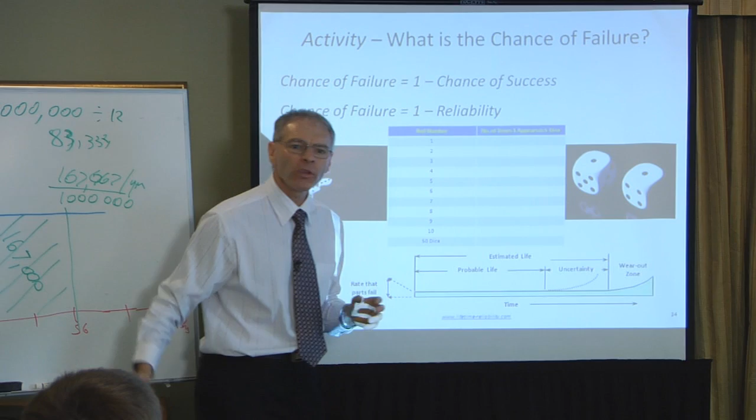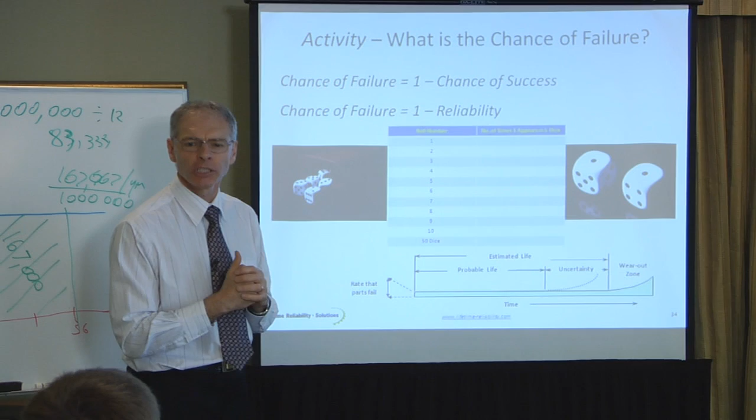If I roll the dice and I get two ones here and those two represent a failure, then what can I do to ensure that those failure situations don't arise? If they aren't there to have an opportunity to fail, then it can't be a failure. The machine carries on going. So this concept of chance and managing chance becomes very important because reliability is the chance of success. If I want to have high success, I've got to have high reliability because the two are linked.

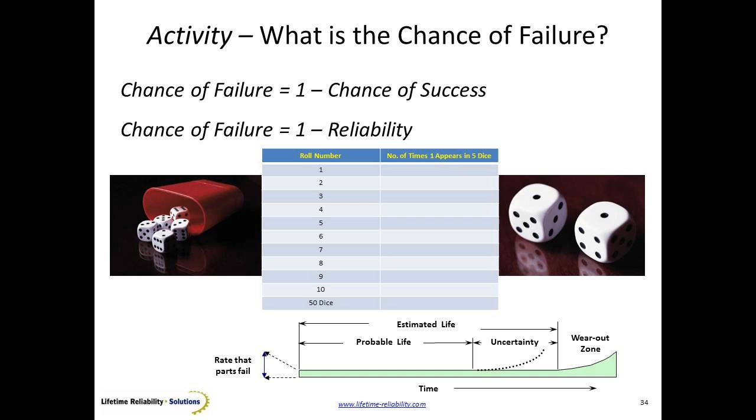So whatever affects reliability and lowers that, I've got to stop that. I've got to find it and stop it. Then I have created a higher chance of success, which means eventually the failure rate will decrease. Doesn't mean it's going to happen overnight. Some of these things take months to come through, but if I'm doing the right things to begin with, the right results come out at the end. So I want to start with what are the right things, and start doing the right things because they will pay off down the track.

Okay, so what are the sort of things that are opportunities for lack of reliability? Poor balance, wrong fits and tolerances, wrong tension in fasteners, shafts that aren't aligned or shafts that are loaded up and stressed, rubbish in our lubrication. These are all opportunities for things to go wrong. It doesn't mean because they are there it will go wrong. It just means where they are there, there's a chance it'll happen.

If there were no problems with fastening, if my shafts were correctly in line, if there was no contamination, then the opportunities would not be there. The chance of failure, much, much less. So if I can manage contamination and prevent it, manage alignment and ensure it's correct, get the right fastening, get the correct fits and tolerances, get the correct balance, I will cause reliability. I will decrease the chance of failure.

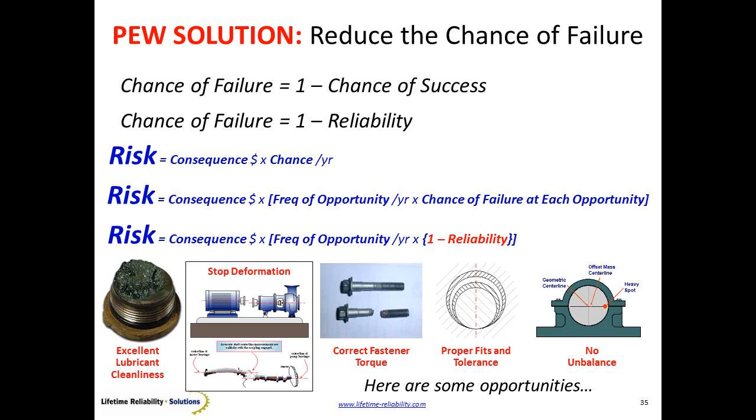So now we have our risk equation. Risk is typically consequence times chance, as most people see it in the books. This is a situation that Einstein warned us about. One of his advices was to make things as simple as possible, but no simpler. And I think the mistake we've made with risk is we've made it so simple we've actually missed the real meaning of what risk is, because this equation here has dropped off one factor in risk.

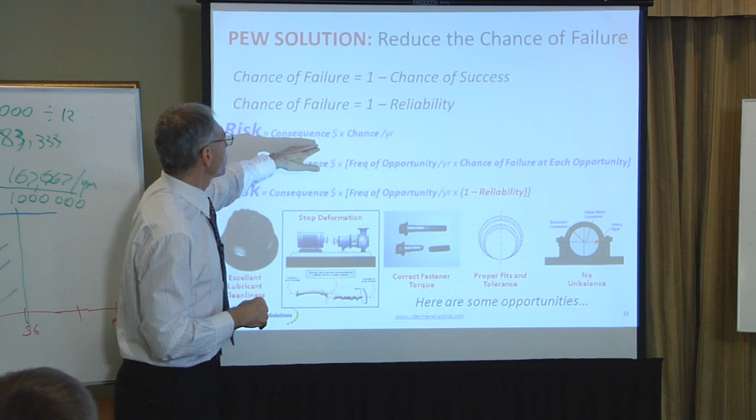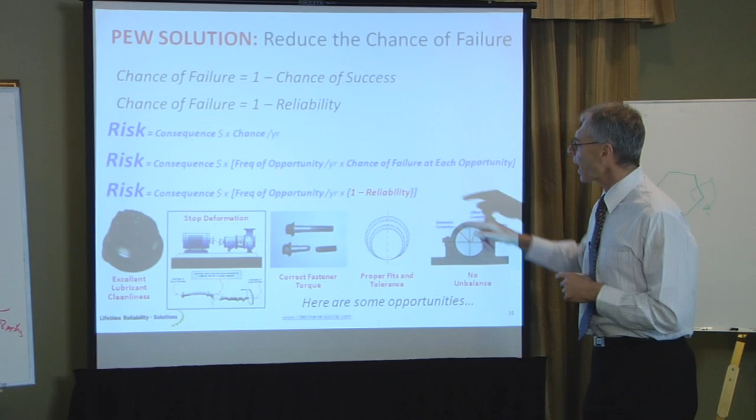The full equation of risk is consequence times the frequency of opportunity times the chance of failure at each opportunity. What this equation has done is dropped off this opportunity word. It doesn't show us there are actually 3 factors that affect risk. And this chance of failure is actually 1 minus reliability. There it is, chance of failure, 1 minus reliability. So I have now tied reliability back to risk. High reliability and this risk of failure is reduced. If my risk of failure is high, my reliability is going to be low.

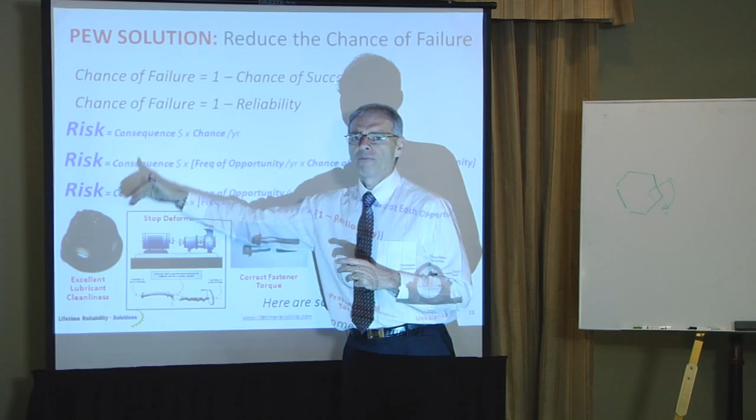So if I can manage opportunity and prevent that by everything being right, then as a consequence, opportunity gets smaller and smaller. If I can ensure reliability by making the right choices, by installing things correctly, by running things correctly, then these 2 factors can't work together and the risk of failure drops lower and lower and lower. And that risk of failure falling means my uptime increases, my throughput increases, my costs are reduced, all the things we want to see happen.

So yeah, that's why I'm confident. It's not going to be impossible to get these outcomes because all of these are controllable. Once I set the standards that deliver high reliability and meet those standards every single time, then I will produce those results.

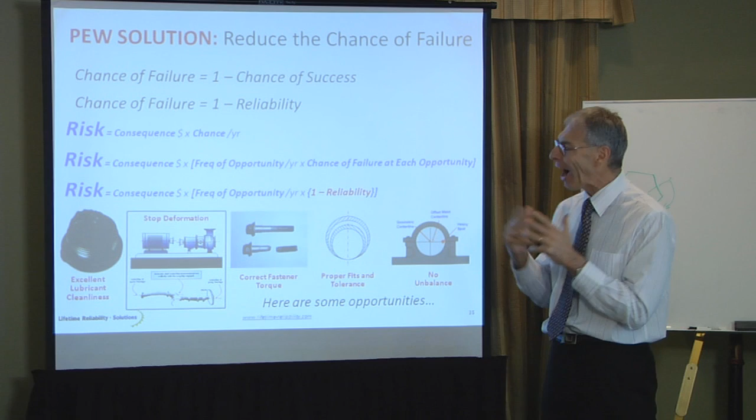What this is saying is a couple of things. All of us have a risk boundary. You drive a car? Do you know what? People die on the road from driving cars. So you're going to drive home from this place? Anyone? Yeah, we all accept a degree of risk, even though we can die tomorrow on the way home.

So companies are the same. We will accept a degree of risk and do nothing about it. We're going to let the dice roll and just pray the dice falls the right way, but knowing full well they might go the wrong way, in which case, shucks, what a shame. Now, that risk boundary is very important because in that area there, nobody will do anything. Managers won't move, CEOs don't care, nor do you and I.

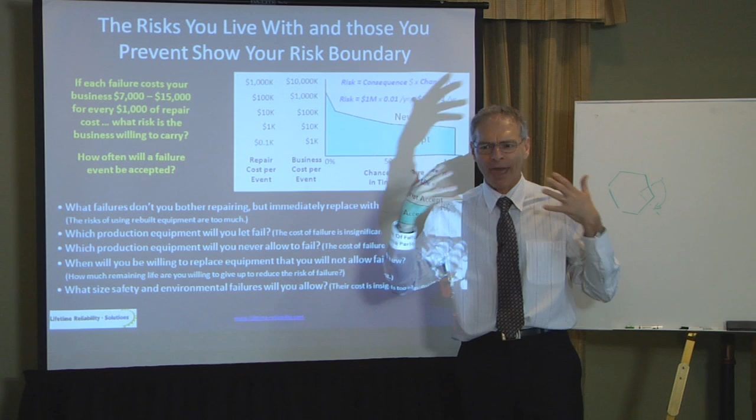So that's human nature. I've got to know this risk boundary for every company because out of that risk boundary, people will move. It's too much risk to carry. We understand the implications of that. So I've got to make sure when I speak to companies and managers about risk that they understand the full size of the boundary they're talking about, how big a risk they're actually carrying.

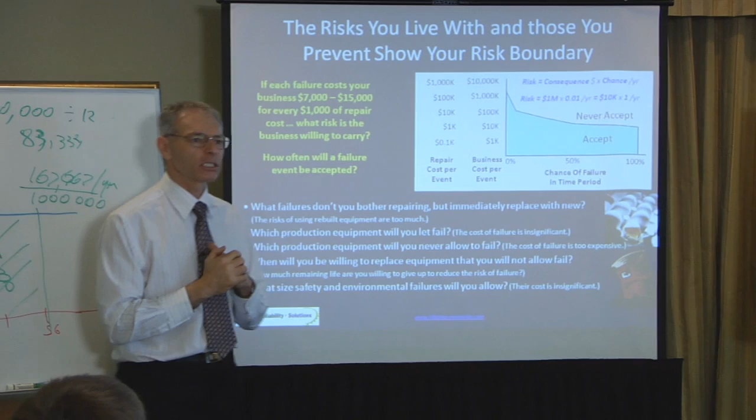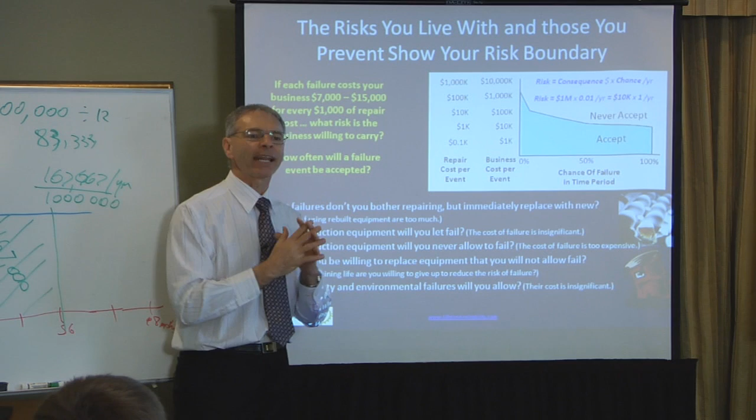Because when we have a breakdown, that breakdown is going to cost money to fix. It'll be maintenance time, maintenance cost, it'll be downtime for the plant, it'll be opportunity lost, money we don't make because the parts that we would have made aren't there to be able to sell. So there's a whole lot of money lost when we have a breakdown. And so when I build this risk boundary for companies, I've got to find every single cent that they lose and that they miss out on making had there been no failure.

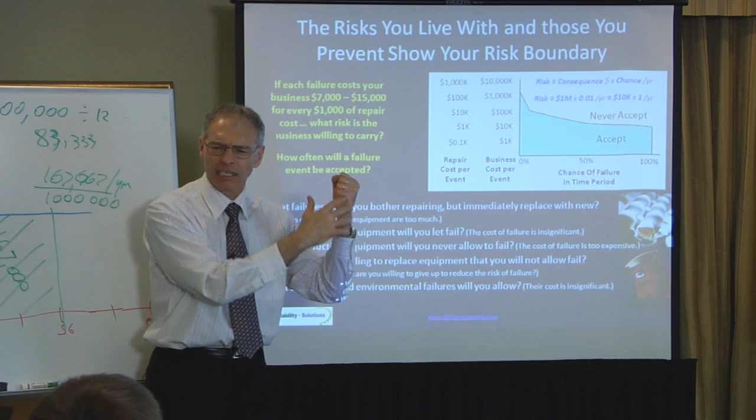And my experience is that I can work out a ratio between the cost of direct maintenance versus the total cost to the business of all the losses and costs. If I can get direct maintenance cost, that's easy. That comes out of my computer system. Easy to get those numbers. To get the total business-wide cost, not so easy because there are so many unknown factors. How many sales could you have made but actually weren't made? You don't know that. But there's a way of allowing for those.

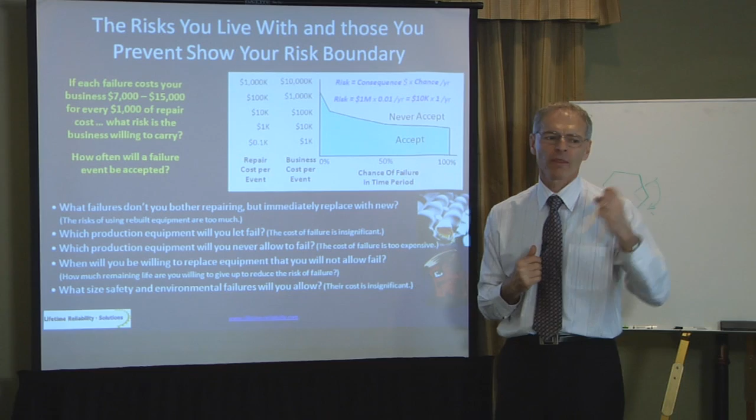What I found is when I do the calculation between direct maintenance cost and total business-wide cost, typically it falls in a range of 7 to 15. Direct maintenance cost of $1,000, depending upon the process and the company involved, company-wide may actually mean a $7,000 cost or loss, up to $15,000 cost or loss. So to keep things simple, let's call it 10:1. For $1,000 direct maintenance cost, the business loses $10,000 on all the costs and losses that it's incurred.

So now my risk boundary isn't the direct maintenance cost only, it's actually the total money the company's lost. So when a maintenance repair costs $10,000 on the books, the business actually lost $100,000. And $100,000 has more meaning than $10,000. Is that difficult to get a company to acknowledge that extra cost, beyond the maintenance cost? Because in some sense, it makes them look negligent because they've been ignoring these.

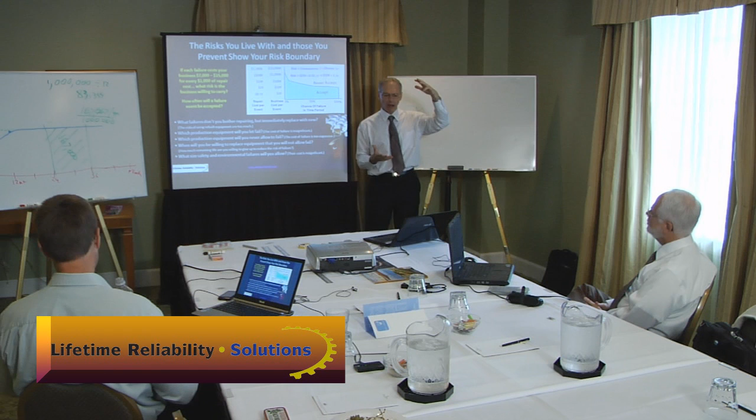It's hard to find how much sales we would have made. They are nebulous figures. So yeah, to get an exact figure is not so easy. To get this ratio, what I actually did back in my time as a maintenance manager is I got some real breakdowns and went back through the whole history of the breakdown. Spoke to the guys that were involved with it, who they spoke to, the knock-on consequences and the different people involved, and I put together a long spreadsheet of all the factors, all the costs, and did a research and analysis, and came up with these two ratios here. Look, it is nebulous, but it is certainly definable. The whole point being is the company will pay everything.

Even though we don't see the money going out, the company is going to pay that money anyway. In extra overtime, in sales that could have been made but that weren't there to make, we're going to lose that money regardless. Though it's a nebulous figure, though it's perhaps undefinable, the money is there, and it's just not there to be made now because of the breakdown.

So I want to make sure that our managers understand this risk boundary. They've got to see the real risk boundary, not the one that they think, but the one the company's actually suffering. Because that number often is a massive number. And that number will justify some big changes and will finance training and finance new machinery and finance new systems. But they just don't see how big a number that's actually falling off the table.

And that's the challenge when we talk about plant wellness, is to show the real financial cost. Because until people see where the money is, how much is sitting on the table they could have got, but just can't see it, they won't move. So I've got to force people out of this acceptable range and say, oh, we'll live with that, into, hey, you know what you're actually missing? You're actually missing absolute fortunes in profit.

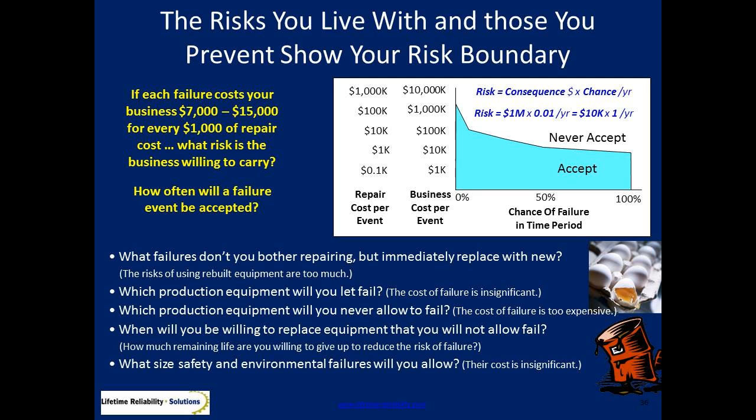Managers are inclined to say, well, this is just the cost of doing business. This is the way we've always done it. This is the way my predecessor did it. That's the way I do it. And I think that's why we know all the answers and they're not being used, because I was taught wrong in university as an apprentice. If you learn off the manager in front of you and you do it his way, I'm sure he's taught wrong. This is what happens. We're just monkey follow monkey.

That's what's wrong. Yet there are companies that do it so well, we look up to them and say, show me the way. They're all out there, they know what to do. I just can't get it to work in my company. And plant wellness is about getting one process, one way only, to make it work in every company. That's the hard part. That's the bit I want. Make this work for everybody, not just for the leaders.

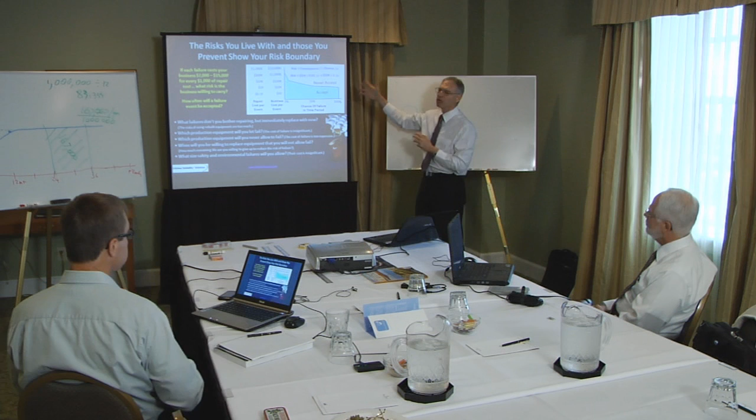Fantastic. I have confidence we can do it because they're doing it. But it's no good to you and me with a struggling company. I've got to find an answer that I can afford. I've got to show them where the money is. They're losing absolute fortunes. That is so easy to get back once you see it.

The risk chart is actually a volume, because there are three components in risk. There's cost, opportunity, and reliability, and the chance. So it's actually a risk volume that we're dealing with, not simply a flat chart. So I can control opportunities. If I can reduce that opportunity to less and less, if I can reduce the chance of things going wrong, then my volume of losses decreases, and the losses that are not happening become profit that I'm now collecting.

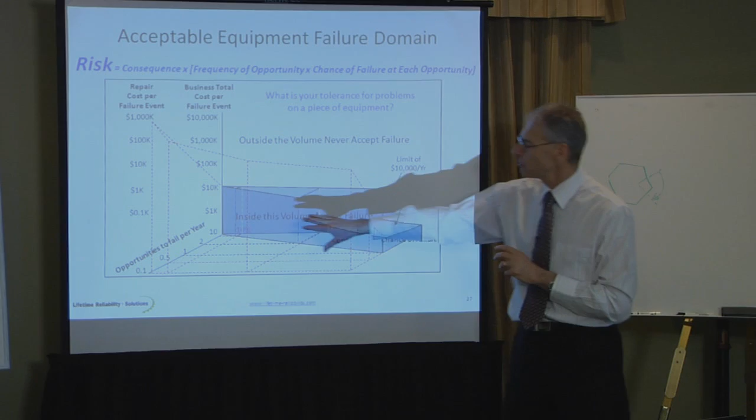So I've got to find answers to prevent opportunities and to reduce risk across the whole life cycle and everybody involved with the machinery. So operations are going to be involved, engineering is going to be involved, maintenance is going to be involved, and finance is going to be involved. I need everybody in the company to understand we all play a part in the success to win back these issues now.

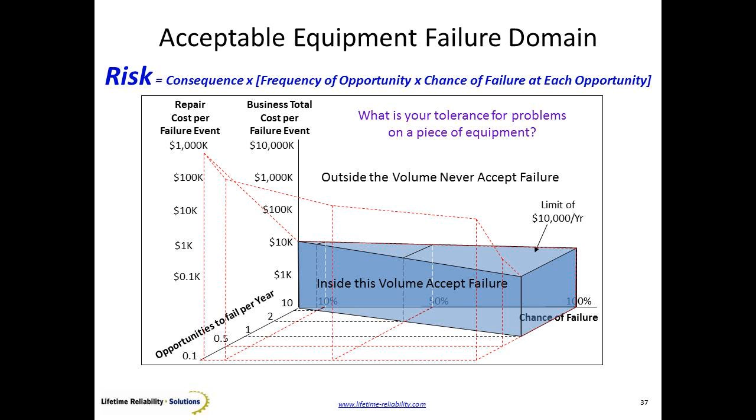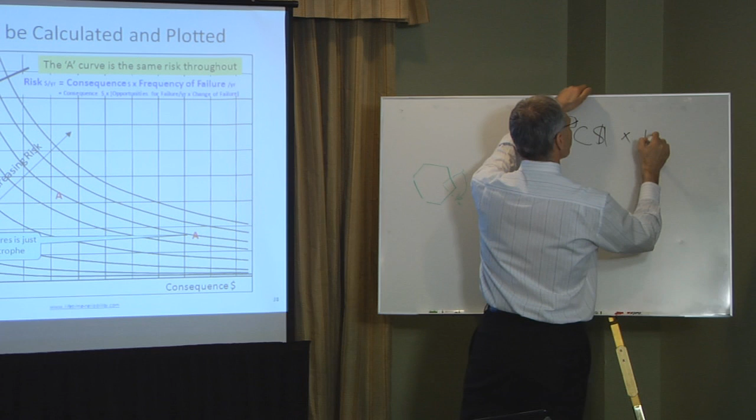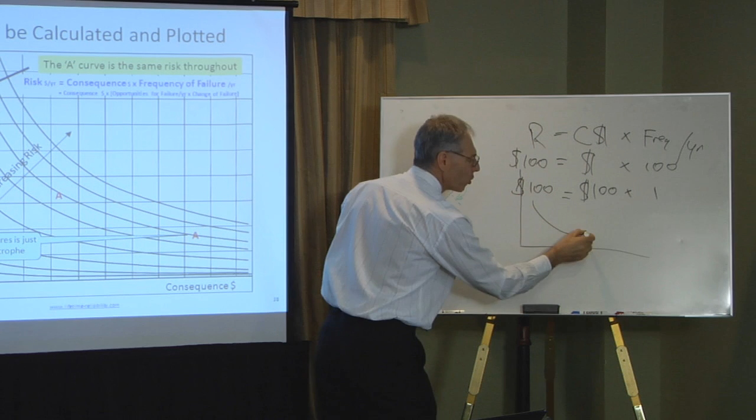Risk, when we chart risk, if we put it on normal type axes, then we get a curve. So risk, if I keep that simple, risk is equal to the consequence, which is dollars, times frequency, which is frequency per year. If I plot that, so if it's $1 and it happens 100 times a year, my risk is still $100. Or it's $100 times once a year, still $100. So that's how we get these curves from that one equation. We just change those numbers and then we get a curve plotting across our chart there.

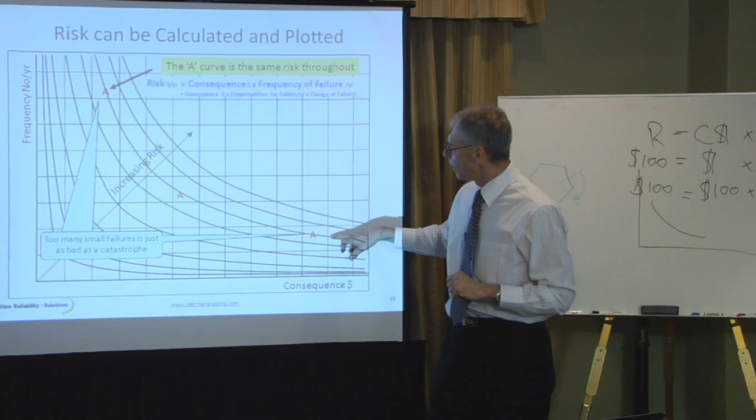What's important here is to realise that risk, that curve, is the same risk of the company. So down here, high consequence, that big explosion that blows up the place, once only, huge consequence, don't want to do that. That's obviously going to destroy the business. The trouble is that risk is the same.

So if I have a problem that comes back again and again and again, over the years, that cost is the same. So repeating problems that cost a little bit of money but are always there, I'm always fixing those, in the end, as bad as the whole place blowing up. The money goes. Instead of being a bucket of money, it's a little drip. Drip here, little drip there, little drip there.

The trouble is the business pays for the lot. So I cannot carry small risks that repeat, because that is a leak. And that leak eventually will drain the business out. If I've got many leaks, I am forever putting stuff in the top to replace what's been leaking out. That was the trouble that these guys were suffering.

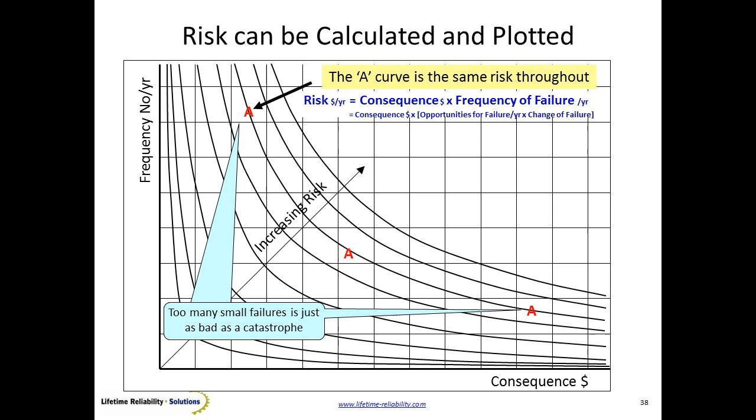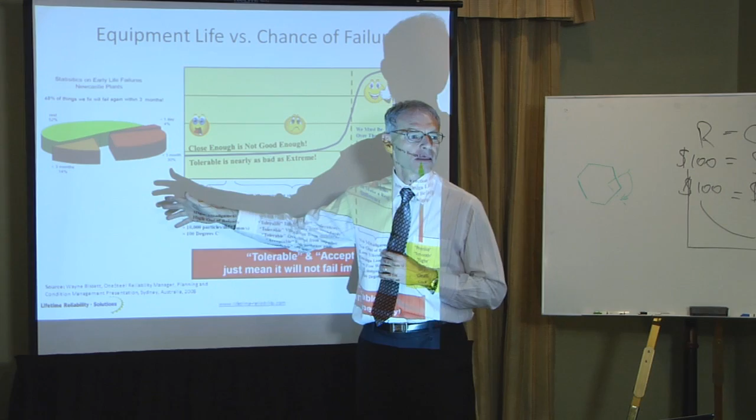Half of what they're doing repeats every 3 months. 1/3 every month. They had massive little leaks. They had thousands of these little leaks, sucking money, sucking the blood out of their business. Because the big stuff everybody sees, that's a big problem, we protect against that. They forget about the small ones. And the small ones are as bad as the big problems in the end. So I've got to be careful. That's what risk is about.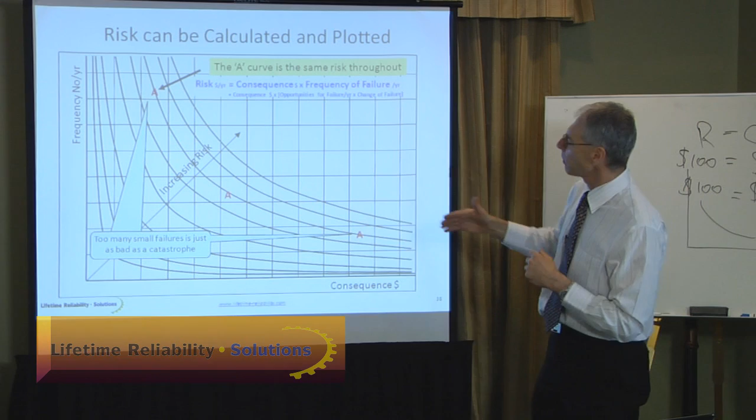Now, risk is that curve. Anywhere along that curve is the same money I'm losing. If it happens to be one event here across 10,000 events, but I've got 100,000 events happening every day, I can lose money very, very fast, but a small amount each time.

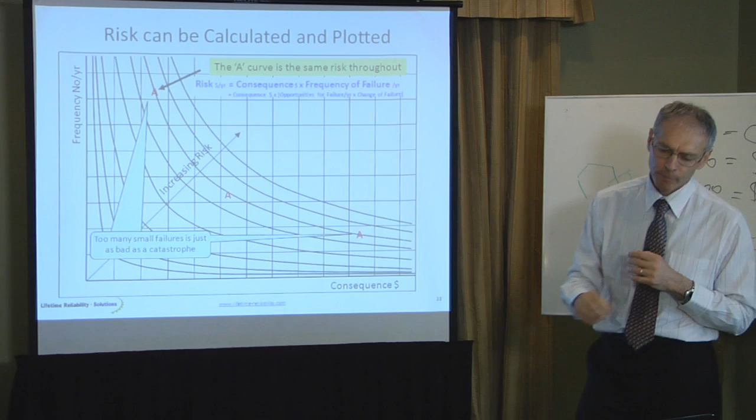When we plot risk on a log-log scale, we get straight lines. Now, you've probably seen a risk matrix, and they use this arrangement here with the different colours. It comes off the log-log scale. So we tend to work in log-log with risk because we're talking about big numbers, millions of times, a chance in millions or a chance in 10,000 years. So we tend to work with log-log scale, but it comes off the same mathematics.

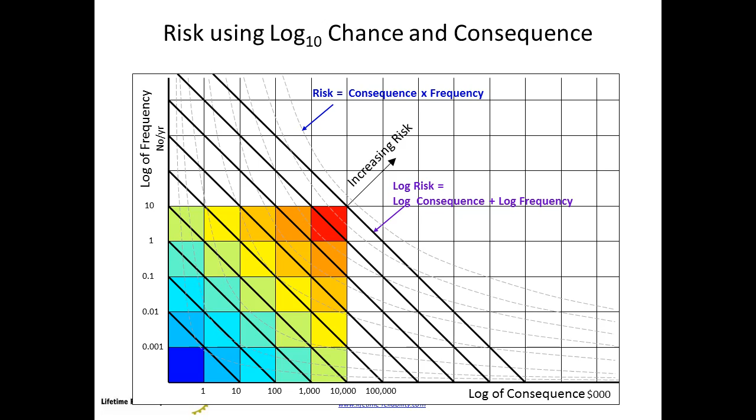So from our risk graph, we get our risk matrix, and this is the stuff many companies now use in terms of managing their safety requirements. What I'm just saying here is be careful. Here on this sort of matrix, we've got lots of red. Lots of red, of course, is bad, extreme risk. The trouble is that comes from this part of the equation up here. And it's only a small area on the actual graph that is a high risk area.

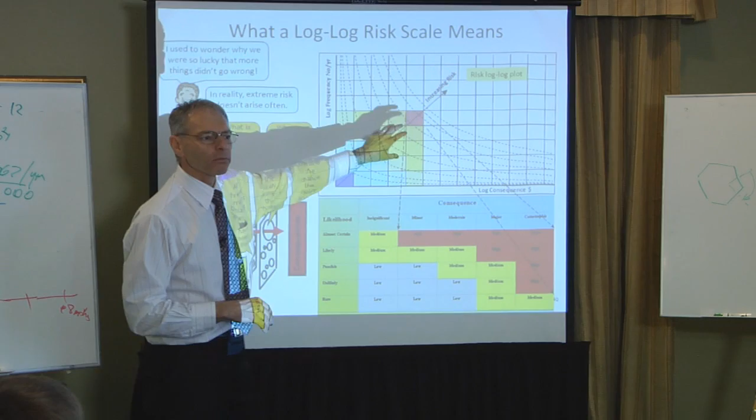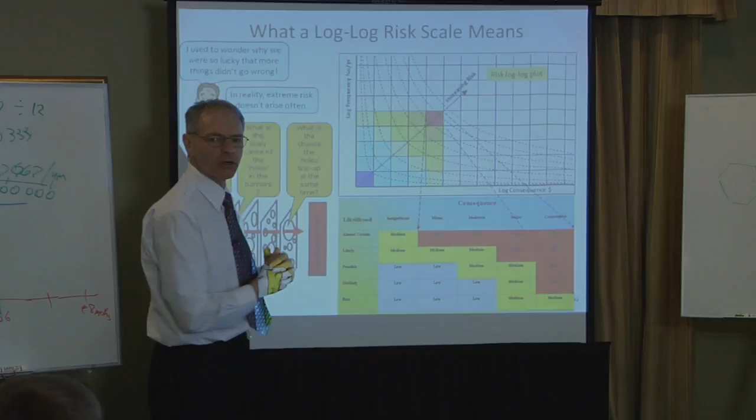Because we're converting a log-log scale into a linear type representation, it appears as if a lot of things can go wrong because there is so much red. It's a bit deceptive. It's not easy to have high risk situations regularly. You get them exceptionally, but this looks as though many things can be high risk or extreme risk. In the real world, it's unlikely because there are so many things that have to line up in a bad way for bad events to happen. But yeah, this is where this matrix comes from, our mathematics.

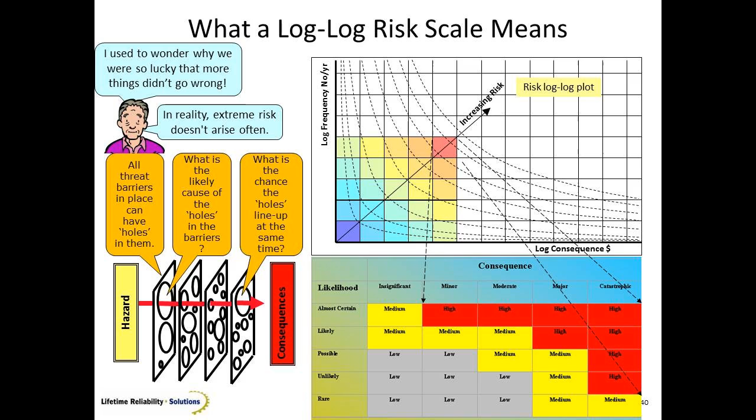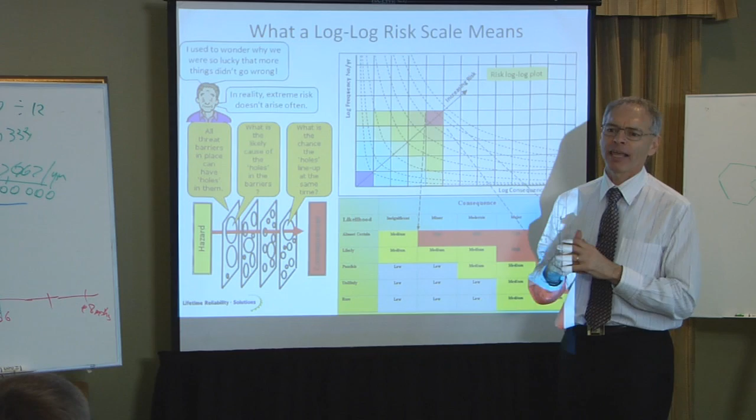What we have to be wary of is if we start getting lots of risk scenarios up here, it's suspicious, because there can't be that many things that go that badly wrong all the time. They're exceptional, but they do happen. This is an understanding of what we try and do to manage risk. This is the Swiss cheese concept of managing risk.

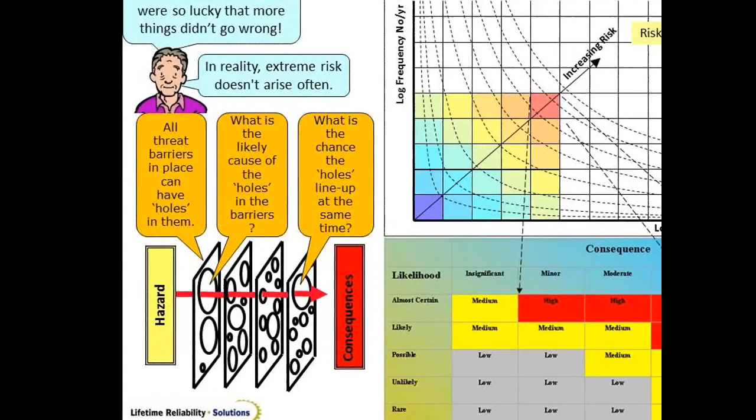What we know is there's a hazard out there. If the hazard isn't controlled, there will be a consequence of some disaster perhaps, or somebody gets hurt. So we put in place various barriers. Things like trained people, procedures, instrumentation, documentation, a whole bunch of things you put in place to prevent the hazard becoming a disaster. Every barrier has weaknesses, and the weaknesses are shown up by those holes in the Swiss cheese.

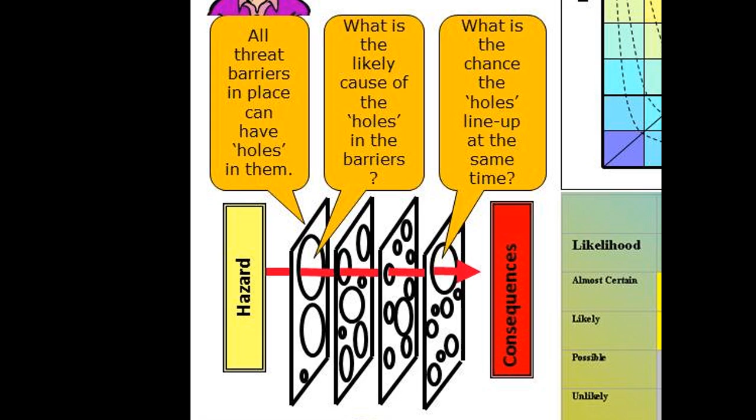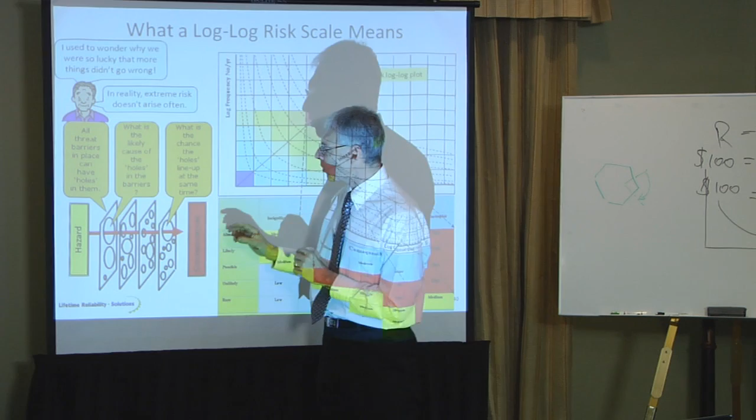Now, the trouble starts when all the holes line up. So when all our barriers have weaknesses, and the weaknesses line up, then the barriers are not functional. So that's a particular model that we use to explain we've got to have enough barriers there, and of course barriers with no holes would be ideal. At least very small holes, and we try and control when barriers are used. So it's a concept of how to manage the dangers in our business and why we do things certain ways.

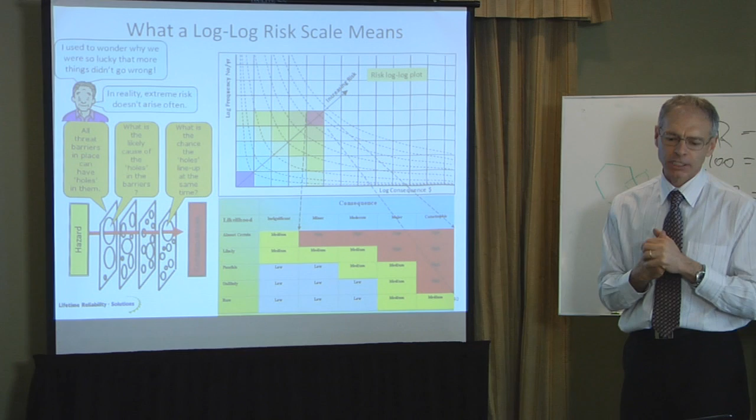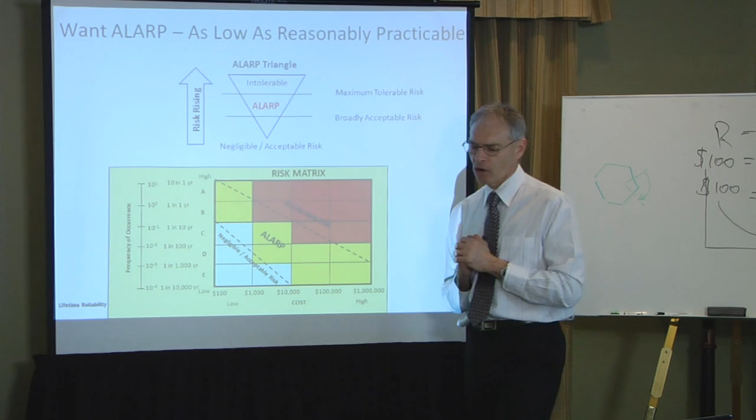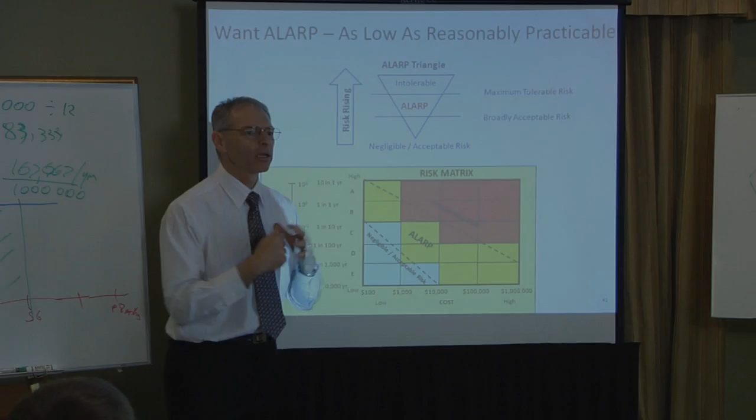In industry now, there's an acronym, ALARP, as low as reasonably practicable, and it comes out of a law case in the United Kingdom, I think after the Piper Alpha disaster. The judge had a look at what is a risk our community, our society will accept. Now, how far should a company go and say we've gone far enough? Because zero risk would be great, but zero risk is an impossibility on this planet, in this universe. So the judge said, look, go to the level of ALARP, as low as reasonably practicable for your industry.

So we then can define what that means, and we get a graph like this, and there's a zone of ALARP. Now that isn't as good as you can be. ALARP is what is acceptable as reasonable to do. Oh, we can do much better. But at least now we have a way of understanding we've got to be within a zone of acceptance of risk. Anything above is unacceptable, and in a court of law you will be found accountable because you have not gone far enough as to what is reasonable to be done.

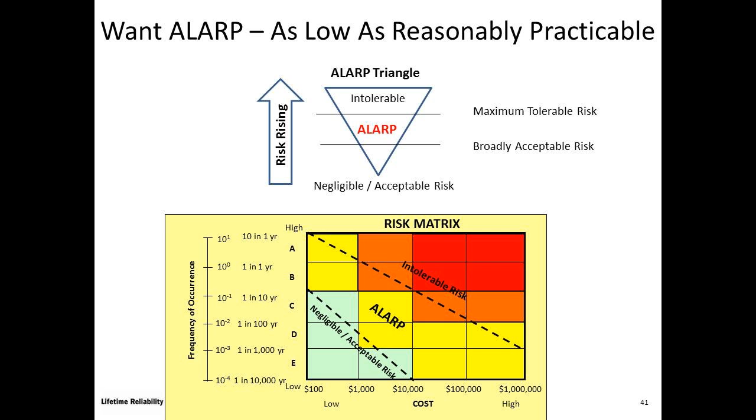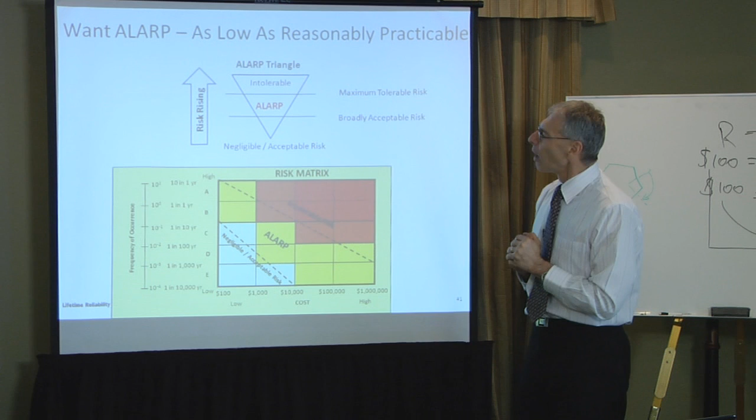That then gives us a way of rating things, how often problems should occur, and anything more often is unacceptable, and of course the costs of those events should they happen. What we want to do is find a way to drive that risk lower and lower and lower, because the equation before told us if I can drive risk down, my reliability goes up. And reliability is where the money is. So yeah, ALARP is worth knowing about, but I don't want to just sit there. I want to push past that, because the lower and lower the chance of things going wrong, the more profit I will actually make.

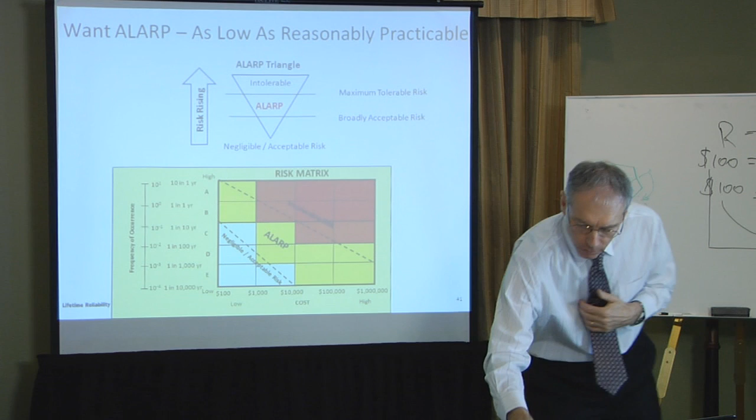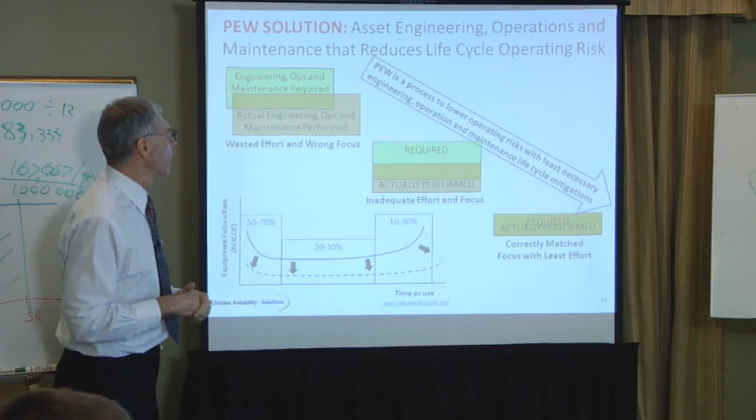So when I find a technique, when I find a strategy, when I find a process, when I find a methodology to create that situation. So we have machines and plant and equipment out there that are doing its thing. Whatever we do to that item of plant, we want to make sure it drives reliability, drives high uptime, drives the chance of failure lower and lower and lower. So we might have machinery and assets, and we do things to it. We work on it, we operate it, we maintain it, we engineer it. Now, if I don't get the right balance, I'm actually doing a lot of work that's delivering poor results. We want to be here. What we're actually doing is down there. We're a long way short of where it needs to be.

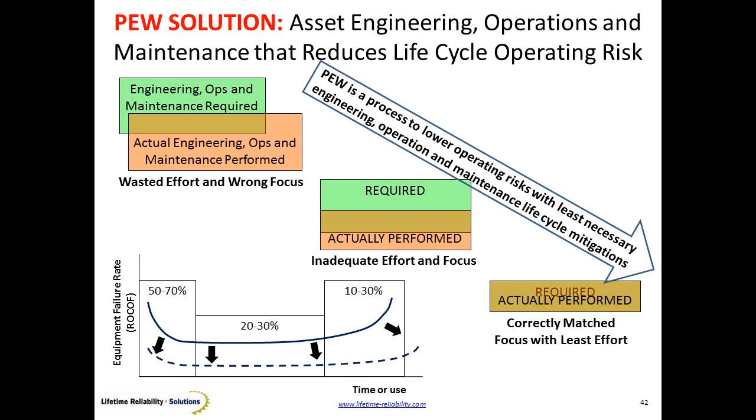So we go looking for answers. And we're looking for answers that drive this curve lower and lower and lower. So we know already to get this curve to go lower, I've got to stop the parts from failing. So I've got to find techniques here that focus on my parts' failures, the cause of their failures, and then a way to remove that cause. So now what I'm going to do is come to this situation here where I'm doing only what's required. That gives me the maximum reliability for the cost I'm willing to pay. And that's the technique that plant wellness is all about. The process to go down this arrow to find the right things to do that in the end is the least required to get the minimal downtime and maximise reliability. And if I can find that process and lock that into the way my company does business, then I will drive reliability and uptime and profit and success.

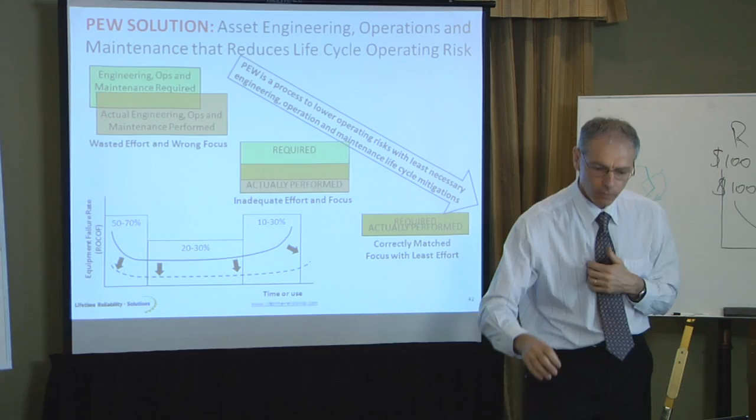So yeah, a solution. And I don't want to have multiple ways of doing things. I want to have a process that is universal, that when I apply the process, the outcomes are always the right outcomes. So I want to have a technique that I can transfer across every business, regardless of what the business is, and it will produce the right results for that business. So the right maintenance strategy, the right operating practices, the right selection of equipment and engineering and materials choices. I want to get all that out of my process.

So I'm going to put in things like my costs, my business successes and losses, what risks are involved, and techniques to remove stress, because stress is the killer. And if I can find a way to do that and manage it, then I will actually manage reliability. I'll actually grow it better and better every year. So plant wellness pulls all this together into a style, into one way of doing it. There are many ways, of course, to come up with maintenance strategies. There are many ways to run your plant.

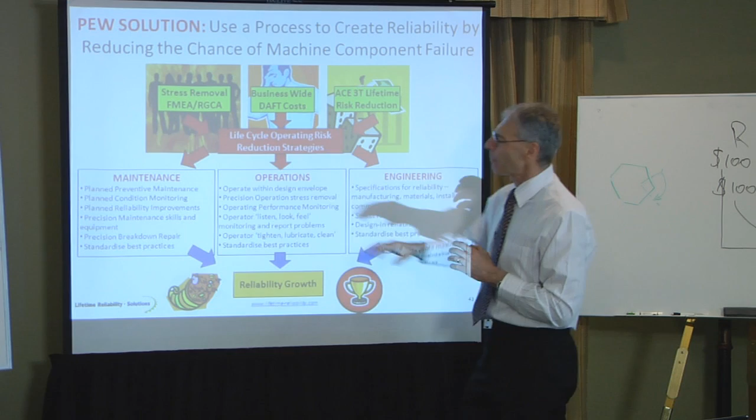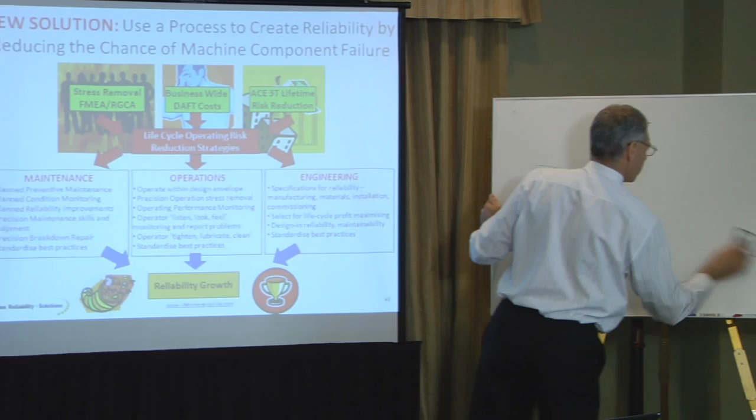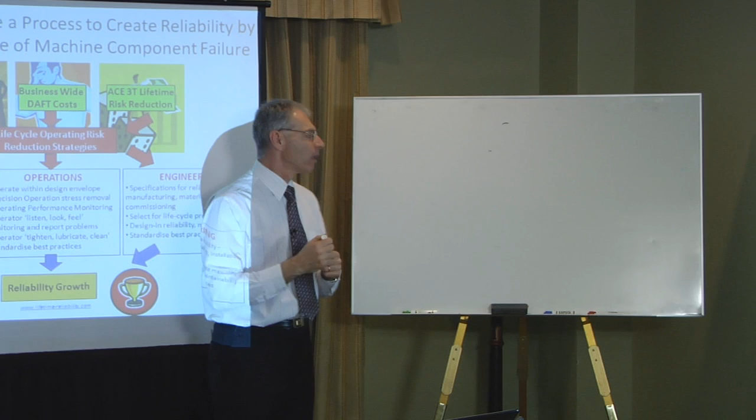There are many consultants out there that do engineering their own particular way. My worry is if I let people do things their own way, follow my manager's previous experience, or follow what that company does, or do it the Japanese way with lean, or do it the European way, then what I'm going to cause across my business world is huge variation.

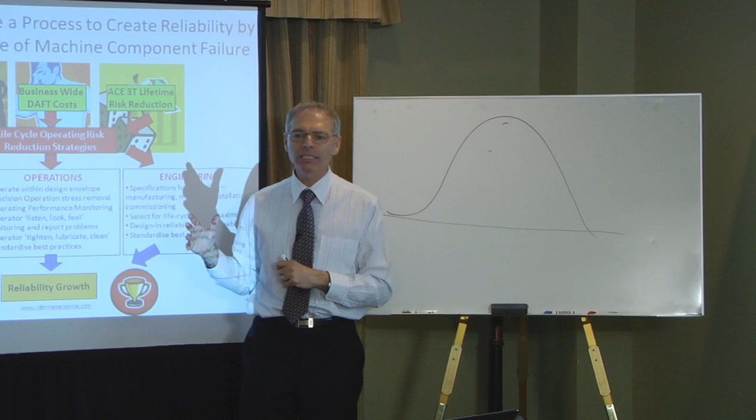Though we're all doing what we think is right, picking the right strategies and our own techniques, running the plant in a particular way that we think is right. If I'm doing this across the American industry or the worldwide industry, I'm going to get a huge distribution because I'm using many ways to try and find an optimal solution. I'm saying no, don't do that. Find one way. Apply only one technique, which in this case is plant wellness, and that technique will deliver outcomes that are very, very tight around the good results that produce reliability.

So though consultants across the world will tell you how to do it, I just think, hey, how do you know you're right? How do you know you're right? What is your thinking that got you to where you are today? Show me the results of your previous work. How successful were your ideas to produce reliability? Because I'm sure many guys will be like that. Many guys will have lousy ideas, some will have totally brilliant ideas.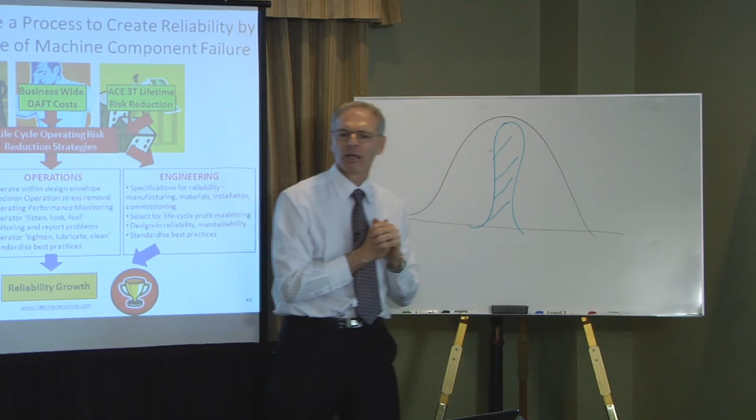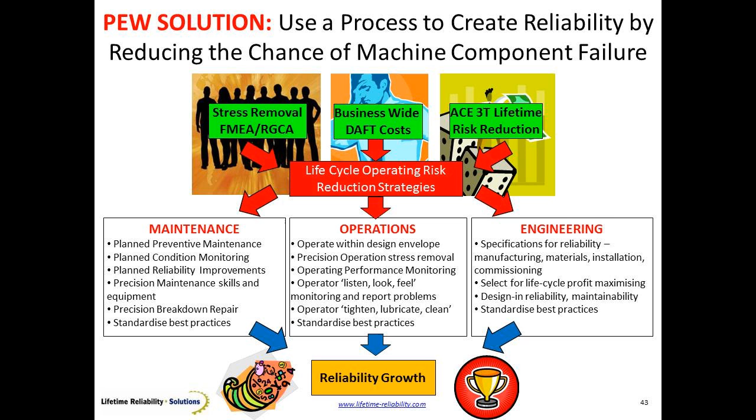But I can't have a huge range of ways of achieving the right outcome. I've got to have one process. Run that process, and that process delivers the right outcomes every single time. So that's why plant wellness is one process, one concept. So I can now control how we do it. I can train guys up to do it the right way, the same way across the world. And they apply the same process and get a very narrow distribution of outcomes, all of which are where they should be.

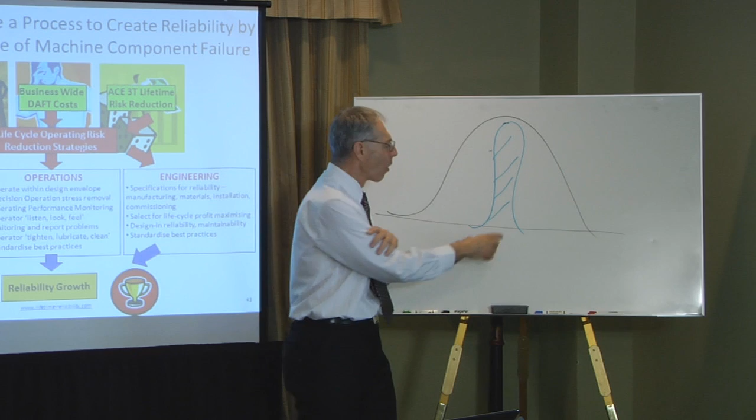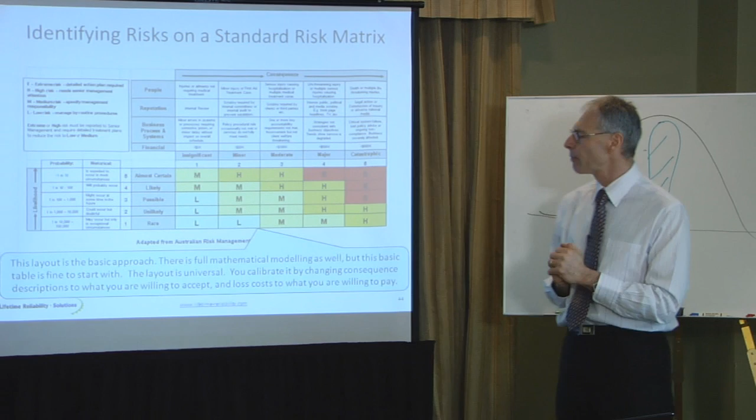Our risk matrix, I've grown this now into what we typically see in most companies, a safety matrix or a business risk matrix. Across the top here are our consequences, and we can talk about dollars and cents. We can talk about health and safety, talk about business reputation. There's a whole bunch of factors that we can indicate as consequence. Down this left-hand side here is the chance, the likelihood of failure. Very common approach, many international standards that can give you the same matrix.

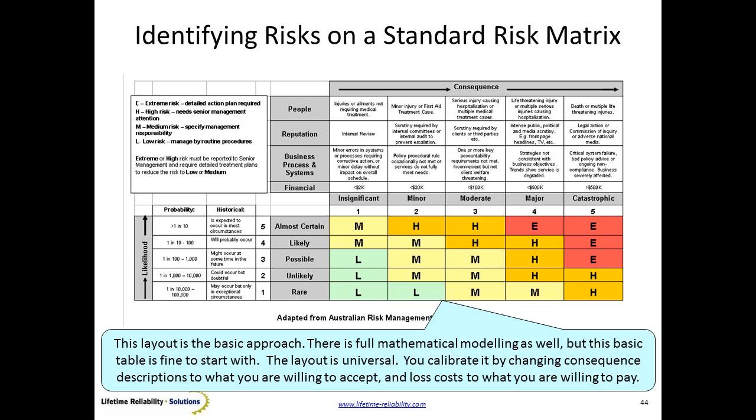And so I want to stick with what companies are comfortable with. Everybody knows this in industry. They understand the logic behind it, understand what the colours mean, understand the relationship between likelihood and consequence. So I don't want to reinvent this because this works perfectly fine. But it's not refined enough for what we want to do in terms of managing our situation with risk. So I've taken that same matrix and now added in more columns. I've broken that up into a finer grading, and the idea is to be able to be more accurate with which cell is the risk cell we're currently in.

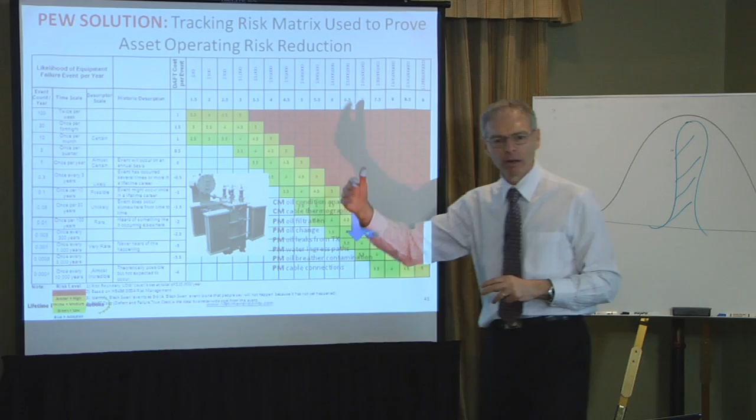Because in the end, if my risk is too high, I want to be able to see that and say, guys, it's too high. Got to go from here down to there. Any ideas how to do that? Please, let's sit down and work out a strategy to get there. So I want to be able to plot my current risk today, and if that's beyond ALARP, or it's too high for what I want to carry, then I want to say, okay, guys, we're here today. I want to be down there. What do we do? And we begin to put together some solutions. And the beauty of this is I can track the progress.

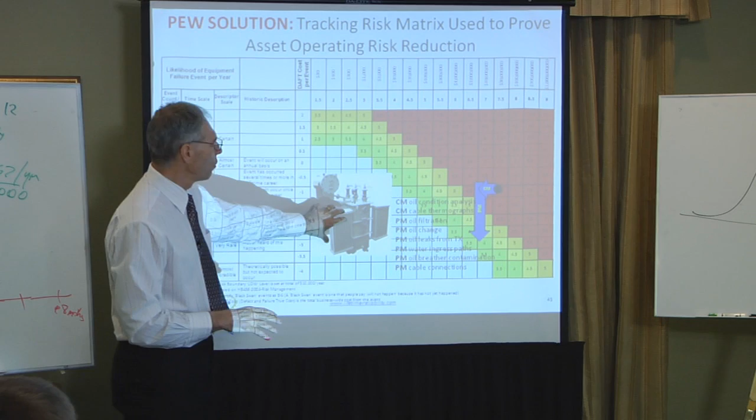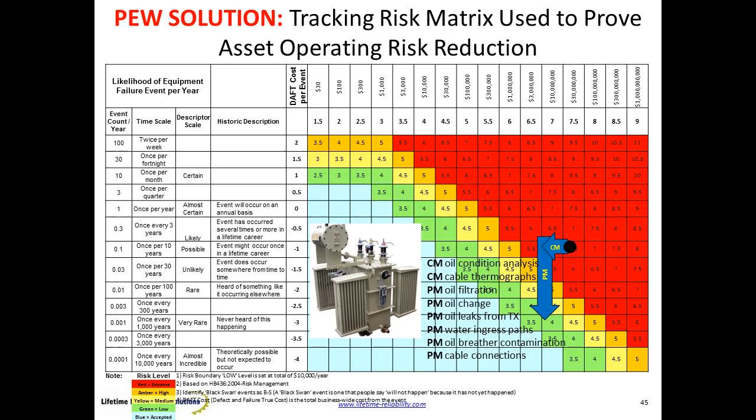I can say, well, if I do this solution, in terms of maintenance, and this is a transformer, for example, on this particular asset, we're going to say, okay, well, if I don't do any maintenance whatsoever, I've bought a brand new transformer, it's going to sit there until it blows up. If it blows up, what's the cost? I can price that. If this thing blows up and it's the only one I've got, I'm going to be down for 2 months waiting for a spare, and in that 2 months I'm going to lose $2 million, $100 million, whatever the case is going to be. So I can plot here very easily a worst case scenario of doing nothing at all. Okay, can't live there.

That's a bad place to try and play the game. I might be lucky. Now this is a risk. Just because I don't do anything doesn't mean it's going to blow up. But the dice begin to roll, and lots of dice start rolling. So I introduce condition monitoring.

Well, when I start looking at condition monitoring, that is finding problems, finding the P point early, finding trouble before it becomes a breakdown. That means if I find a problem with this early on, then I can repair this at low cost versus the breakdown. So now that particular strategy moves me that way on the matrix, moves me with lower cost at risk.

If I can prevent failure, if I can make sure the oil is clean, there's no contamination, that there's no water ingress, the breathers are in good condition and absorbing all the moisture, then I'm driving it down here. I'm having less and less chance of failure. So on my matrix now, I can say, here we are today, guys, historically, or project the future. If that's too much, then I want to move down to here. Give me some ideas. But let's plot these ideas and actually watch this thing moving in front of our face down to this level here.

And so now I've got a way of making very clear where we are and where we want to go to. And each of these will have a particular value and bring some value to the company. So now when I do these maintenance, I'm not doing it because I want to do it or because you want to do it, because the OEM tells me to do it. I'm doing it because it's the smart thing to do for the business. And whenever anybody challenges me in the future, out comes this particular plot and say, well, look, 5 years ago we sat down with this. We're doing these activities on purpose to cause the risk to fall down to here.

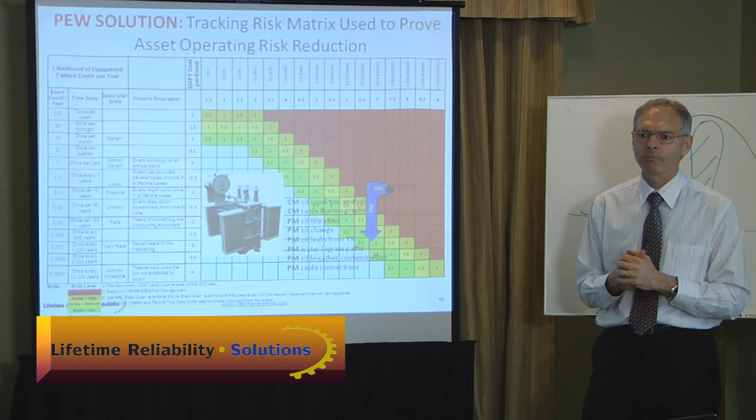So yeah, I wanted a visual way that everybody knows the game now. There's no magic secrets. It's all on the page in front of us. And you and I can talk and make choices and see the consequences within a limit. Now, this isn't perfect down to dollars and cents, but cell by cell, if I can get close enough to a cell, then I'm happy with that. I've got a good feel for the situation there.

So in plant and equipment wellness, we're going to use this matrix and approach a lot, because it's all visual, not what I say. And of course, we're going to have other guys look at this and say, well, you left something out, yeah? And pick everybody's best ideas up. And can I do this simpler? Can I do this faster and quicker? And yeah, of course you can. I don't mind doing it smart, but I cannot not do it. I've got to make sure that these things are done, because it is by doing these that I'm down here. If I don't do these, I'm back up there.

And if you're happy with that, don't worry about it. Just live with it. And of course, if the transformer does fail, well, don't complain. You took that risk. You made that choice years ago and you're living with it. Now that it's blown up and you're down for 2 months and you're going to lose $200,000, $200 million, well, don't complain to me. You chose that years ago.

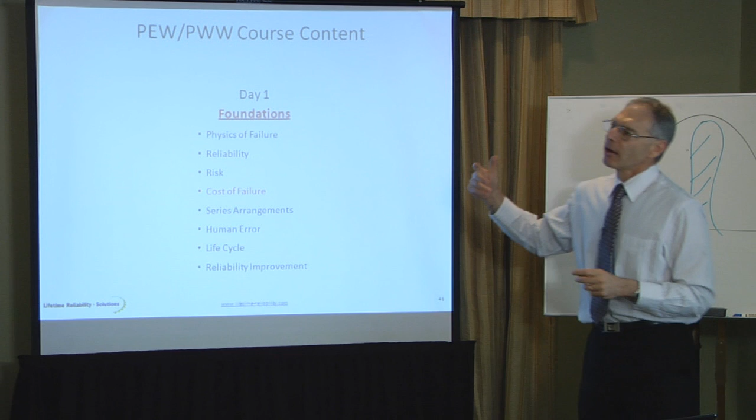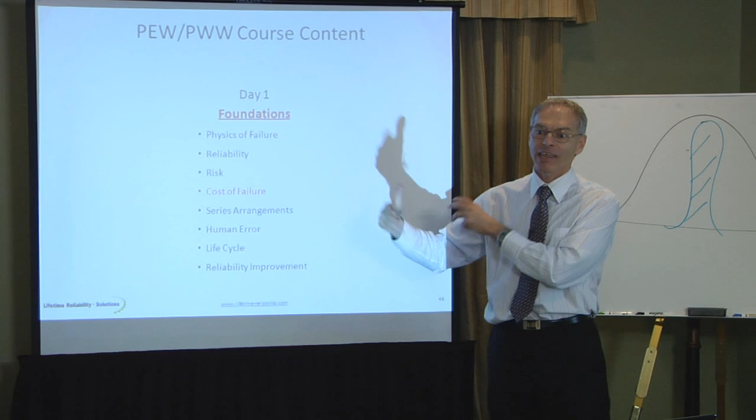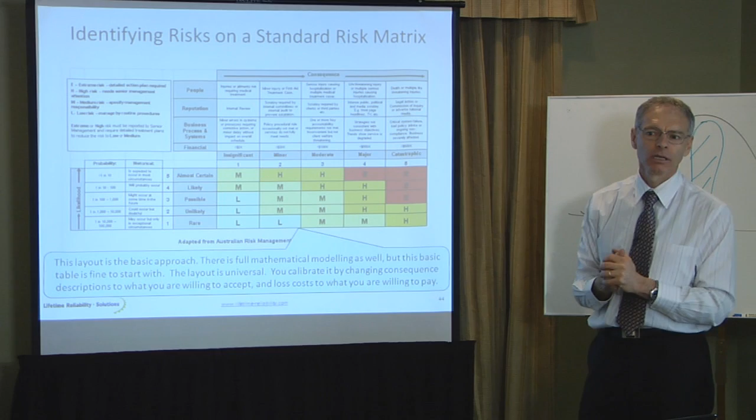So yeah, this is where risk is very important, because if we don't see the dangers, then we don't understand. And that's the bit I think that's missing. Know the concept, just not applying it at the business level, applying it only at the safety workplace level. That is your business. This here is your business. This one page is how your business reacts and impacts on the business. So I liked it very much because it was one page and we can all see what's happening, because you paint the picture very clearly.